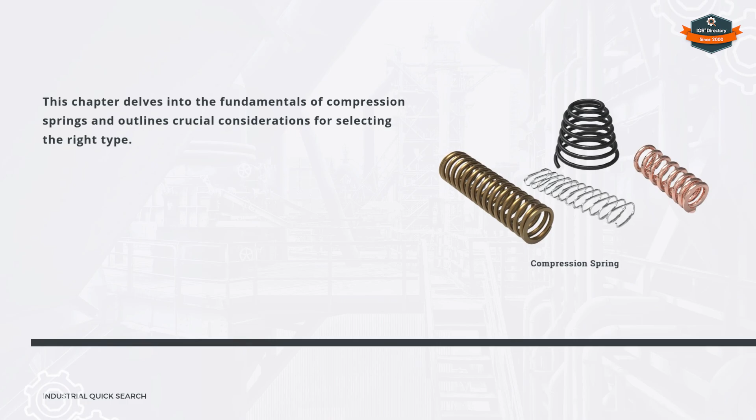Chapter 1: Understanding the principle of compression springs. Introduction to compression springs. Design and functionality of compression springs.

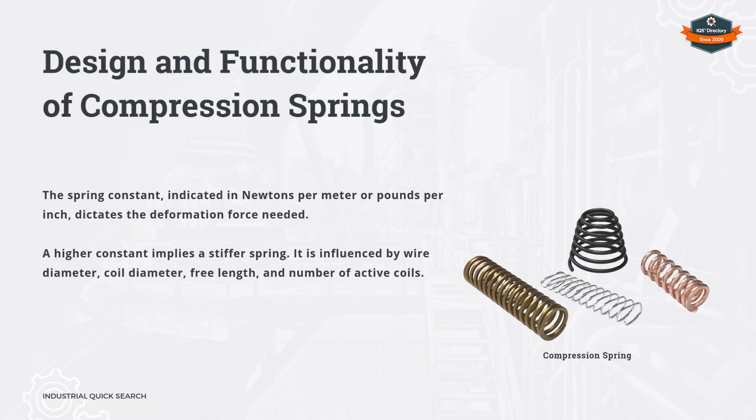Key considerations when selecting compression springs. Types of compression spring ends.

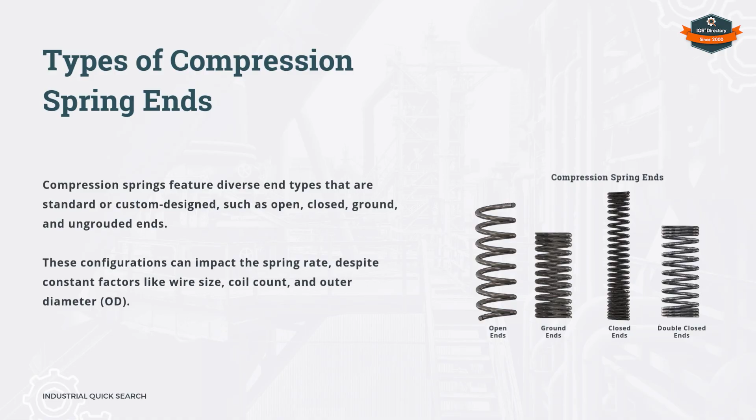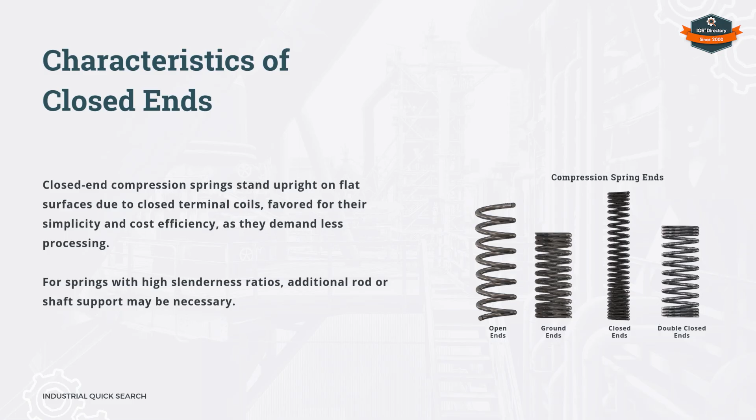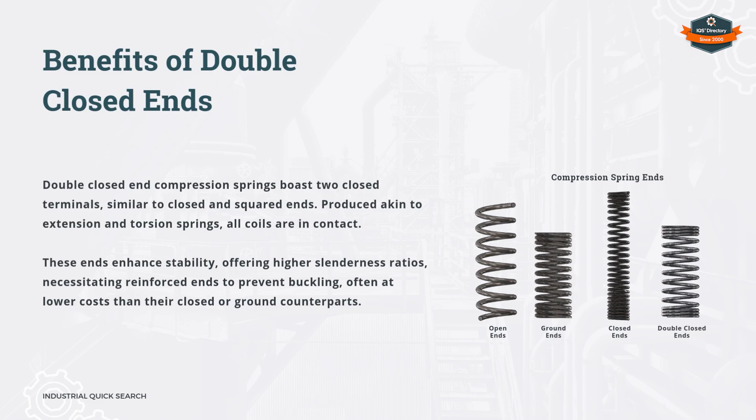Characteristics of closed ends. Features of ground ends. Benefits of double closed ends. Details on open end.

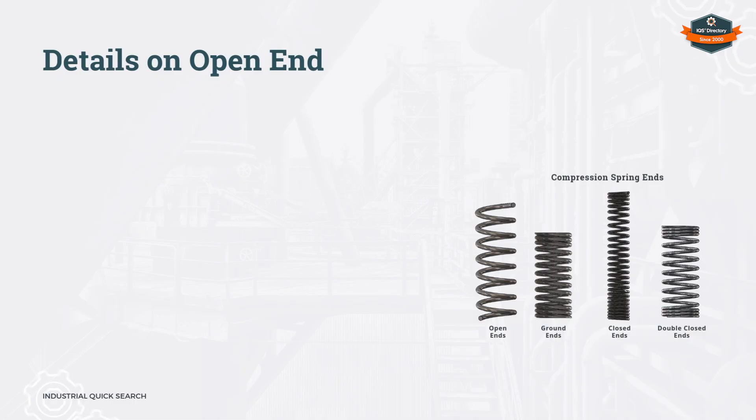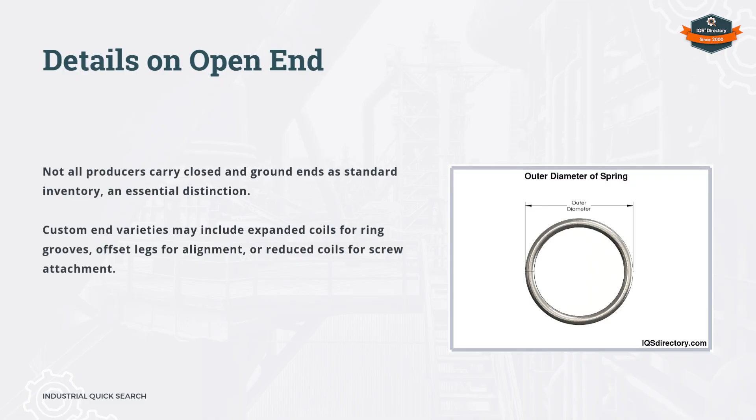Material concerns for compression springs.

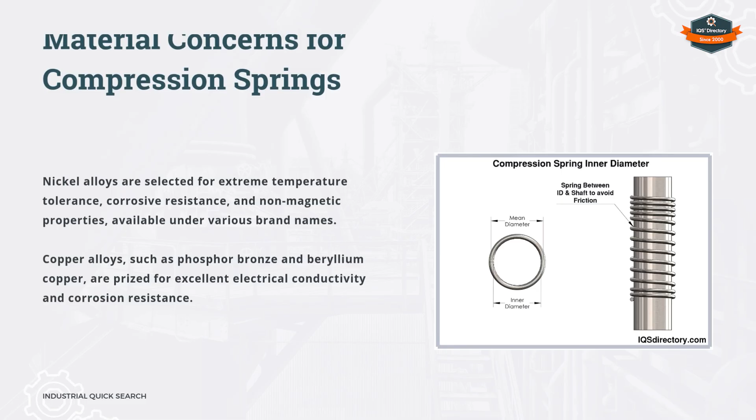Physical aspects of compression springs: outer diameter (OD), and inner diameter (ID).

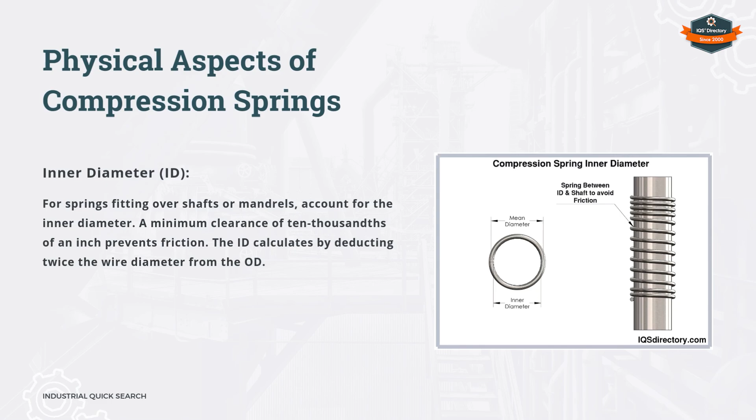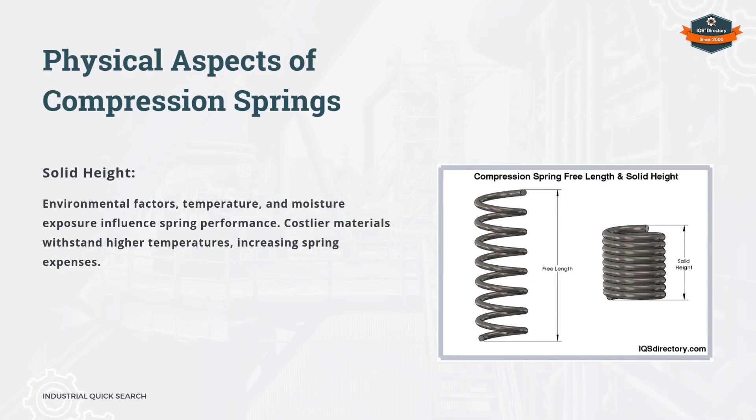Free length. Solid height. Spring pitch.

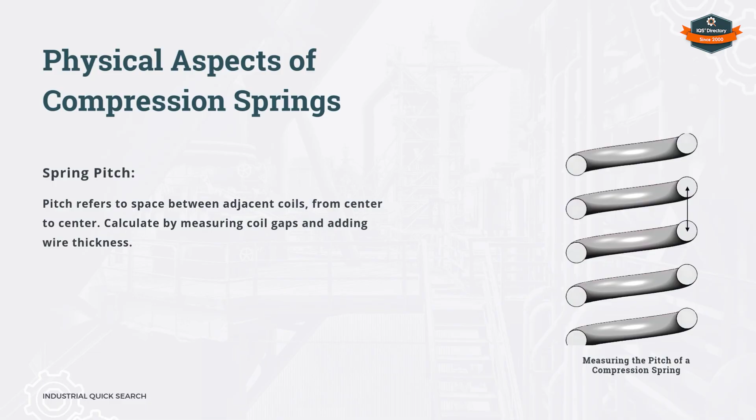Active coils. Total coils.

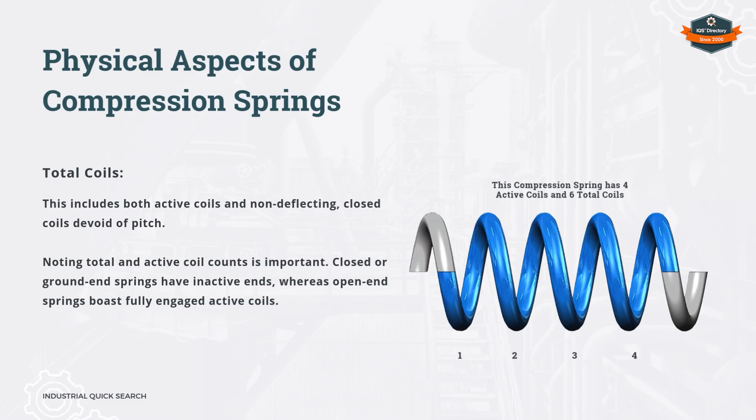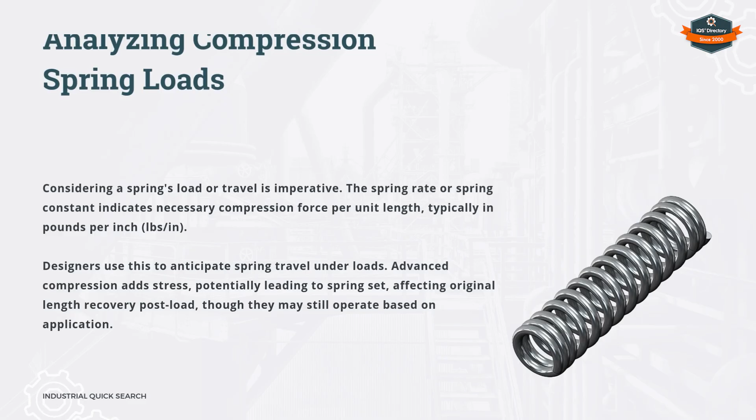Analyzing compression spring loads. Exploring compression spring wire diameters.

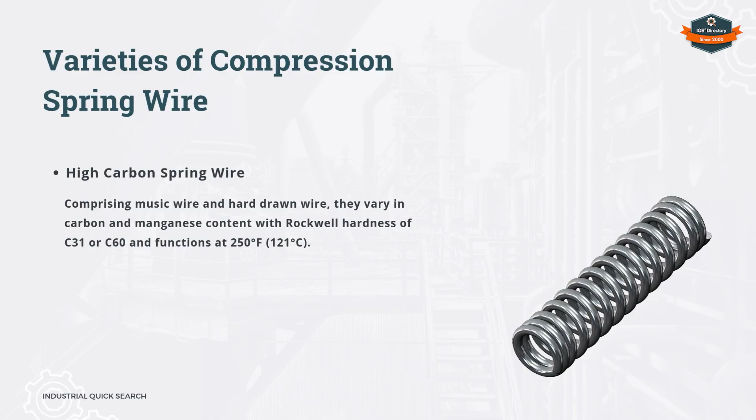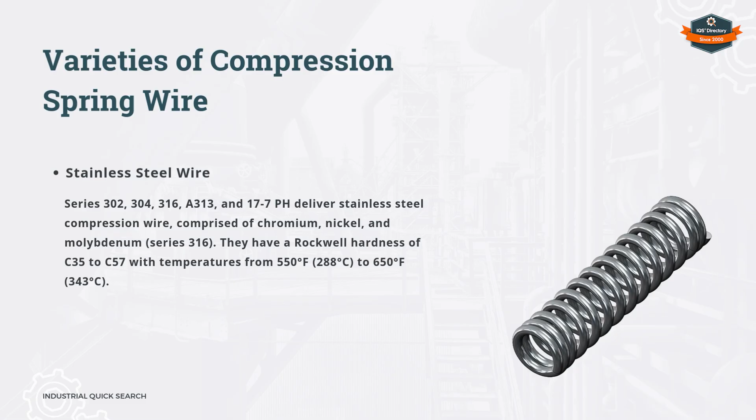Varieties of compression spring wire: high carbon spring wire, alloy steel wire, stainless steel wire, and non-ferrous alloy wire.

Compression spring wire diameters.

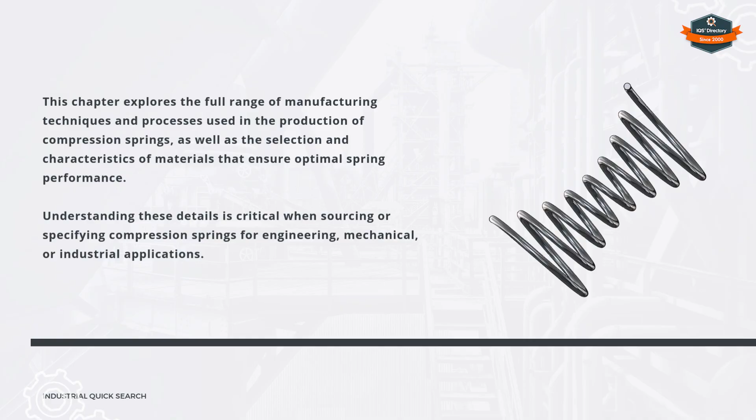Chapter 2: What are the manufacturing processes and materials used to make compression springs? Compression springs manufacturing processes.

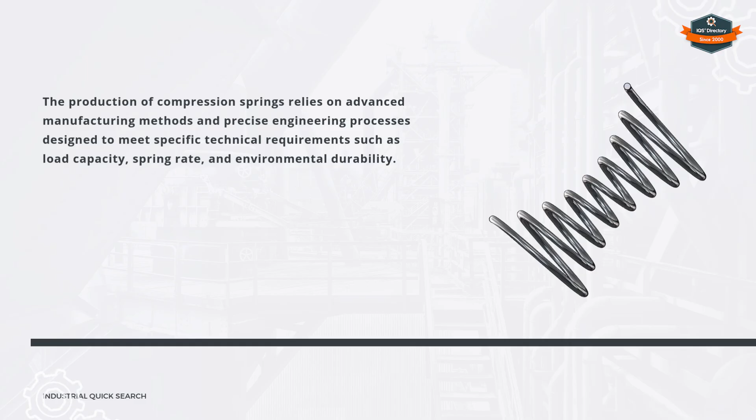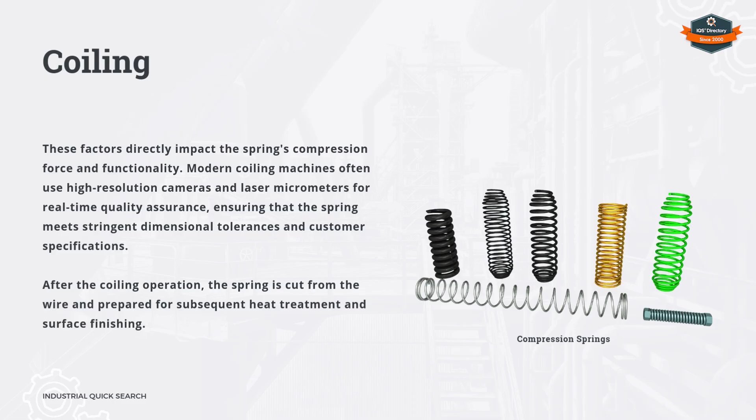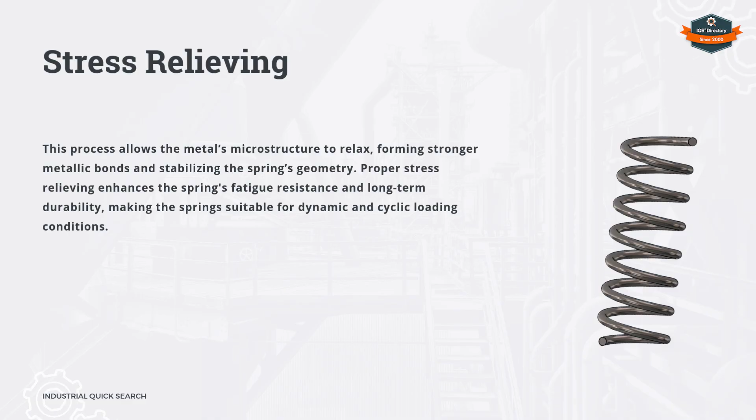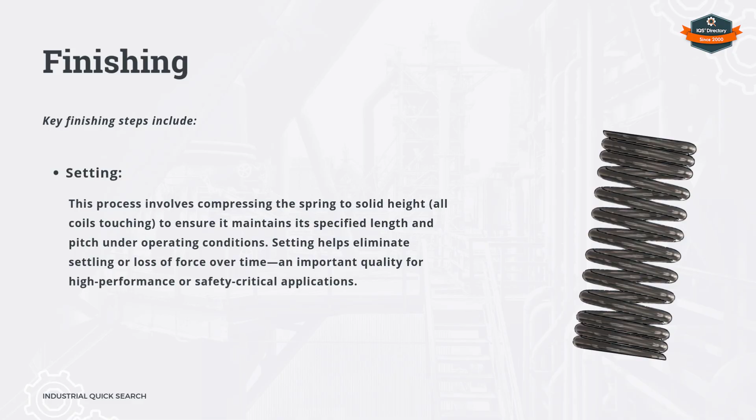The most common manufacturing processes include coiling, stress relieving, and finishing. Key finishing steps include grinding, shot peening, setting, coating, and packaging.

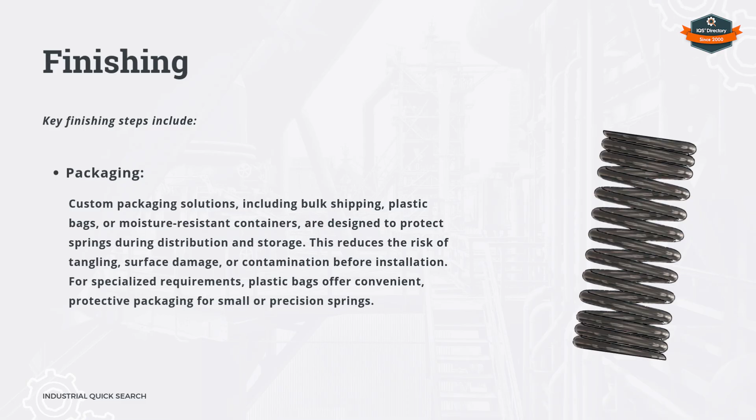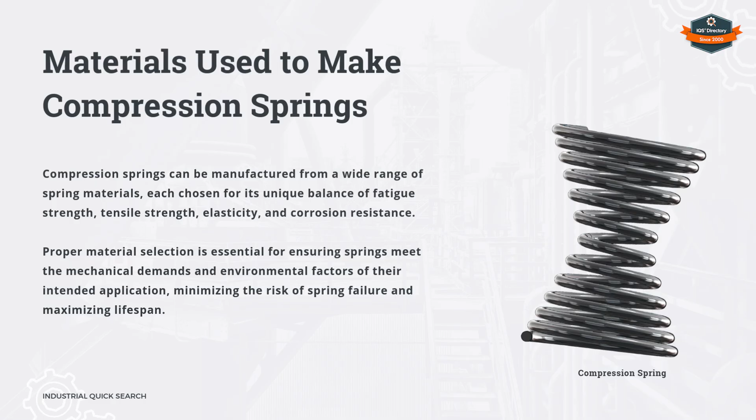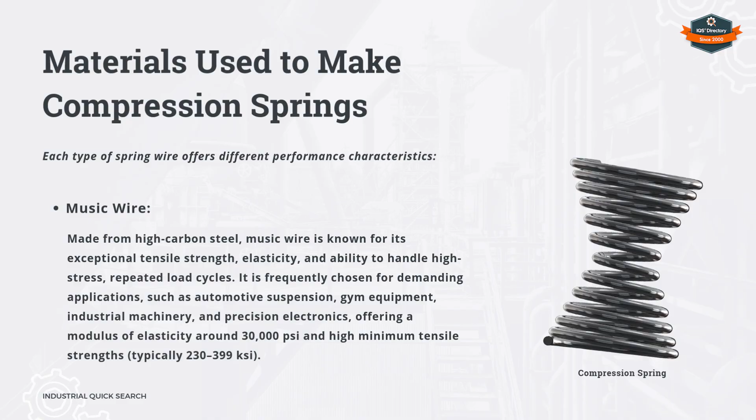Materials used to make compression springs. Each type of spring wire offers different performance characteristics, including stainless steel, music wire, and hard-drawn steel wire.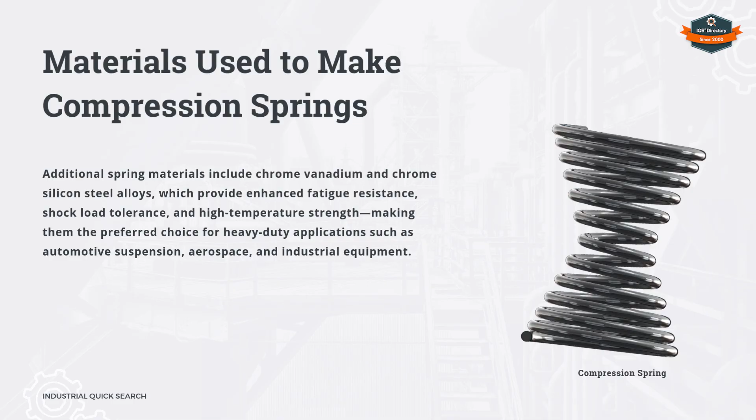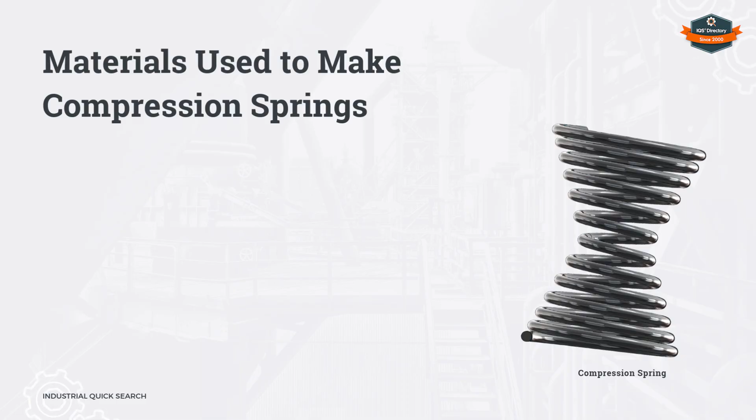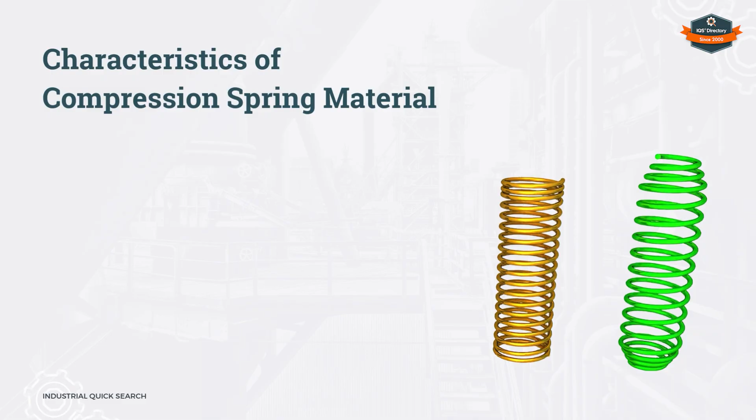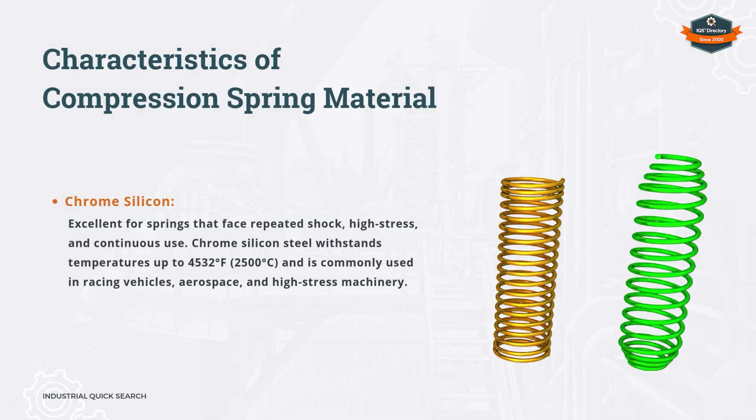Characteristics of compression spring material: cold-drawn and hard-drawn wire, oil-tempered spring steel, chrome vanadium, chrome silicon, music wire, stainless steel alloys, brass, and phosphor bronze.

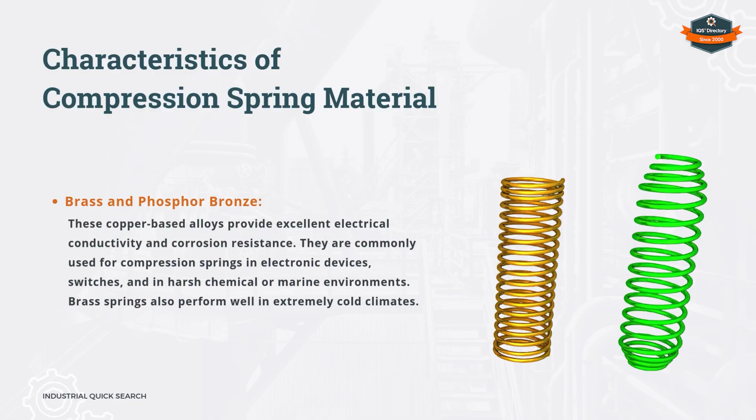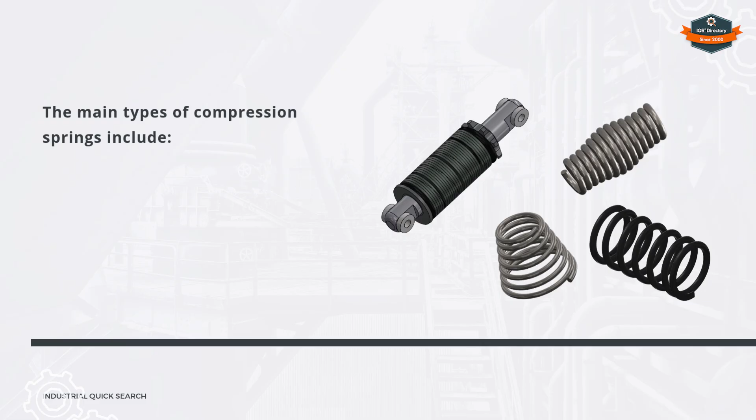Chapter 3: What are the types of compression springs? The main types include convex compression springs.

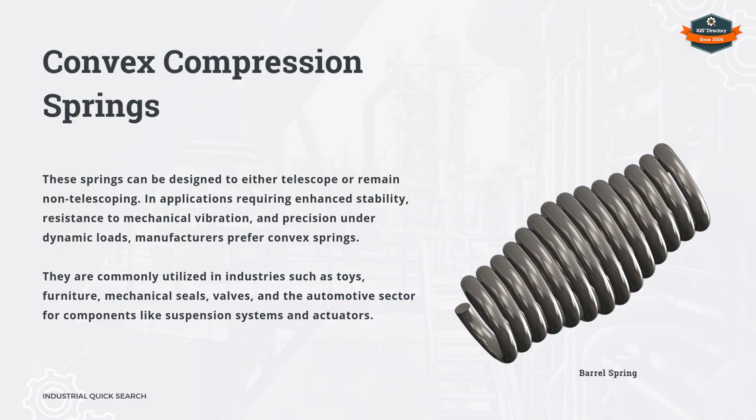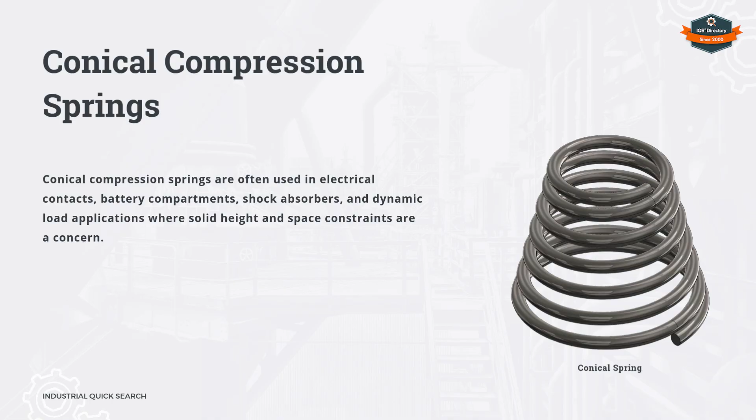Conical compression springs. Disc springs, or Belleville springs.

Here are some advantages of using Belleville springs.

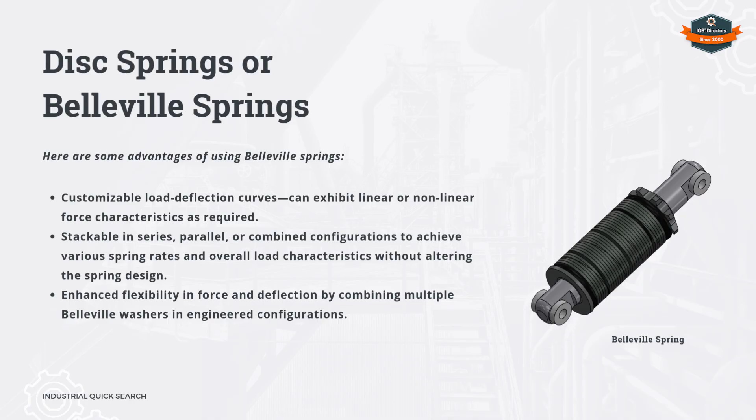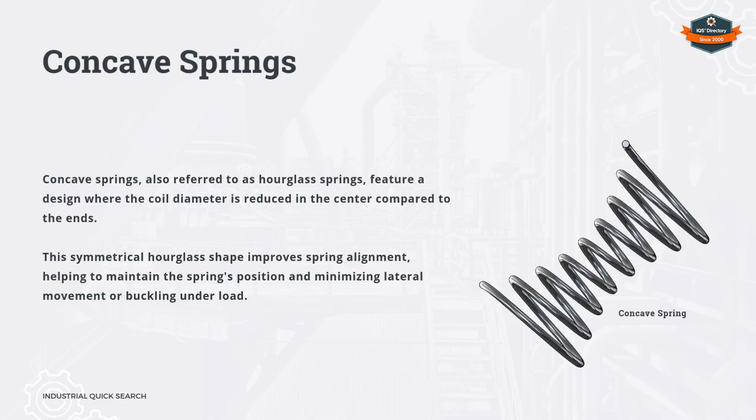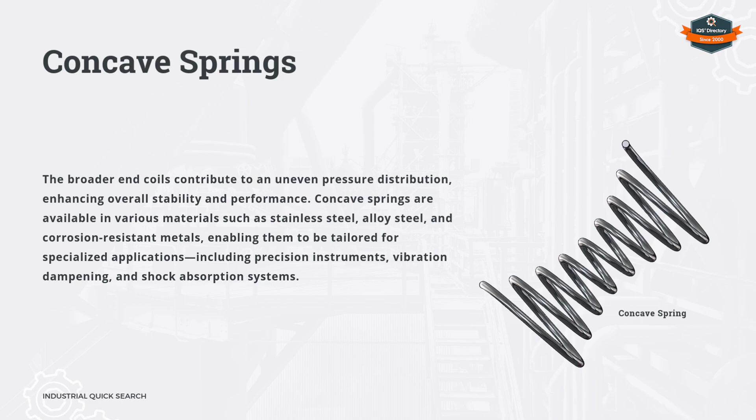Concave springs. Straight coil compression springs.

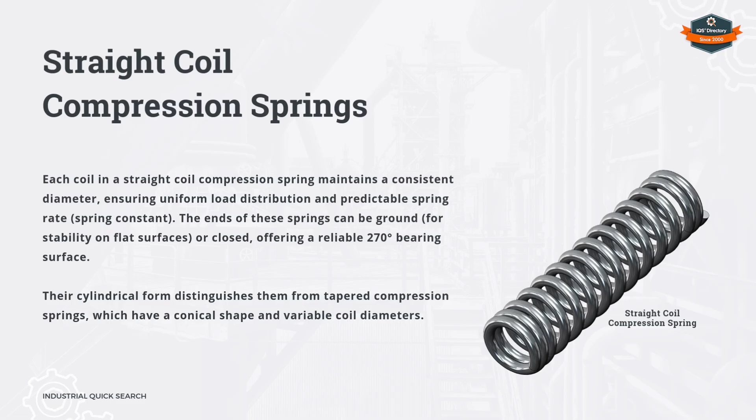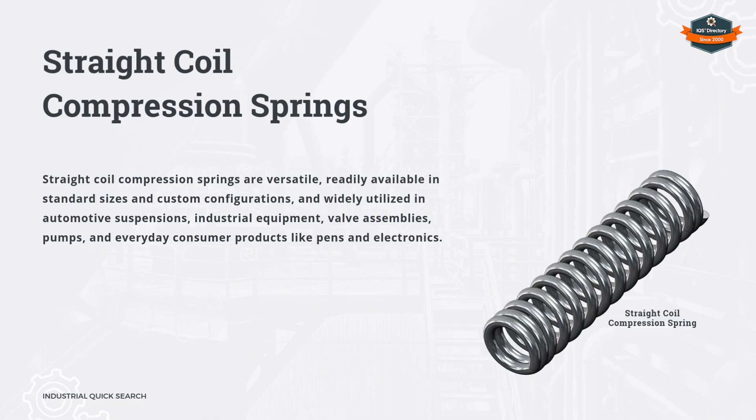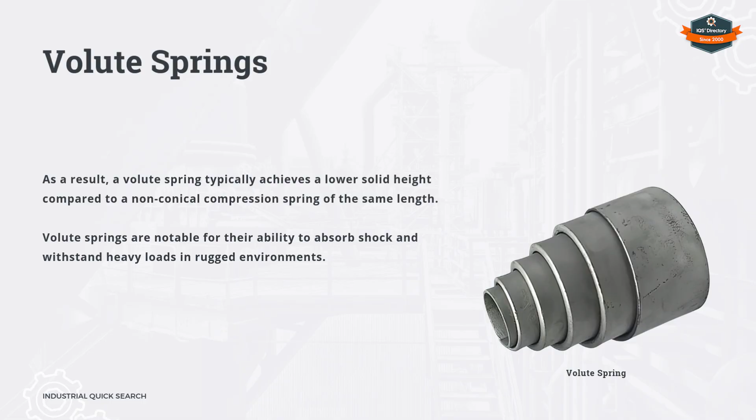Volute springs. Variable pitch spring.

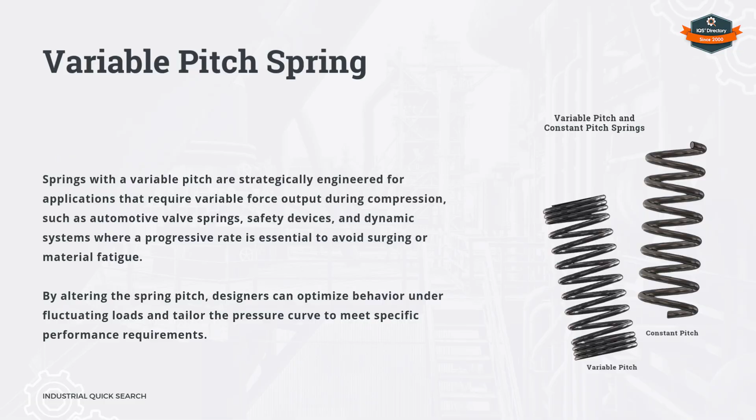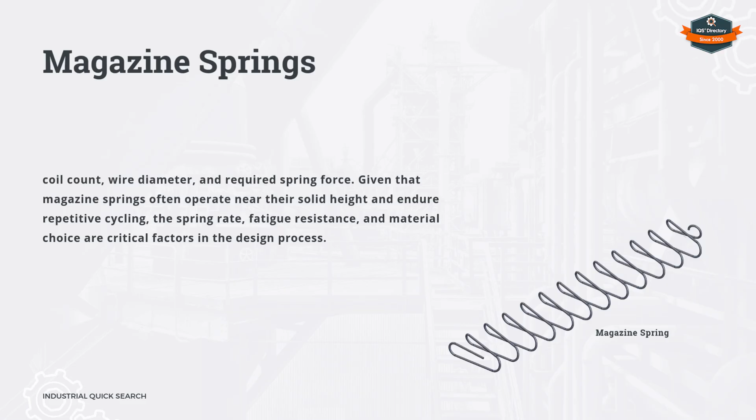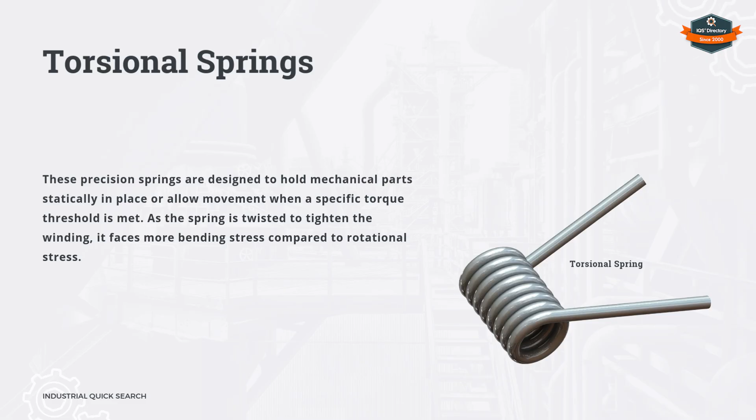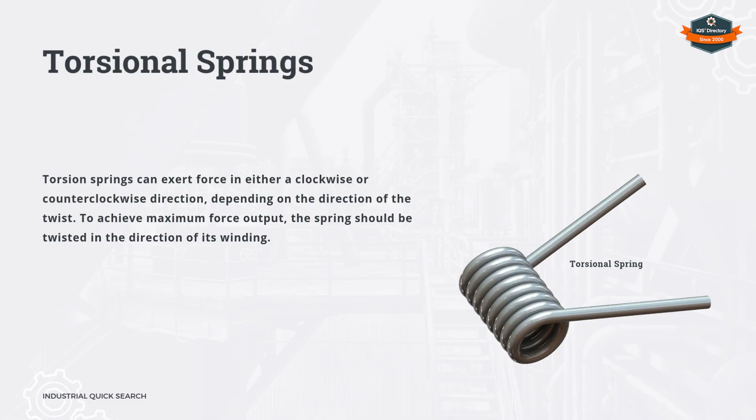Magazine springs. Torsional springs. Tapered compression springs.

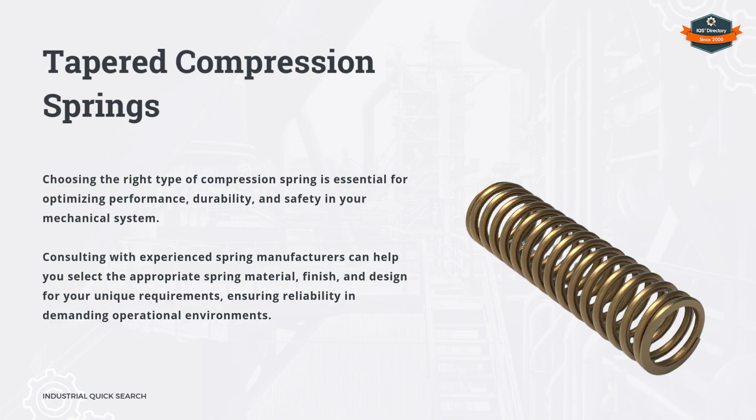Chapter 4: What are the applications and advantages of compression springs? Applications of compression springs include automobiles.

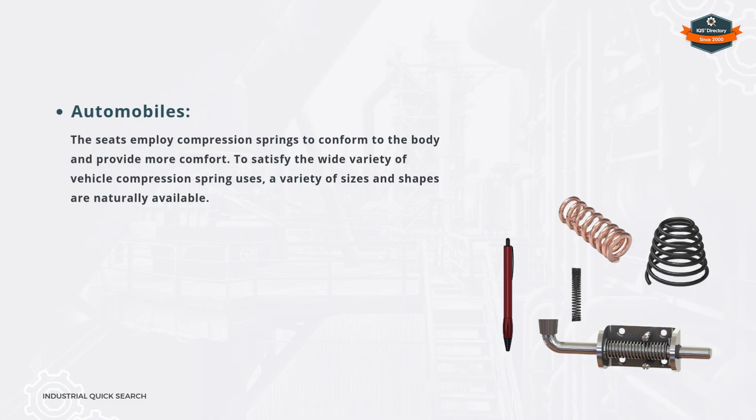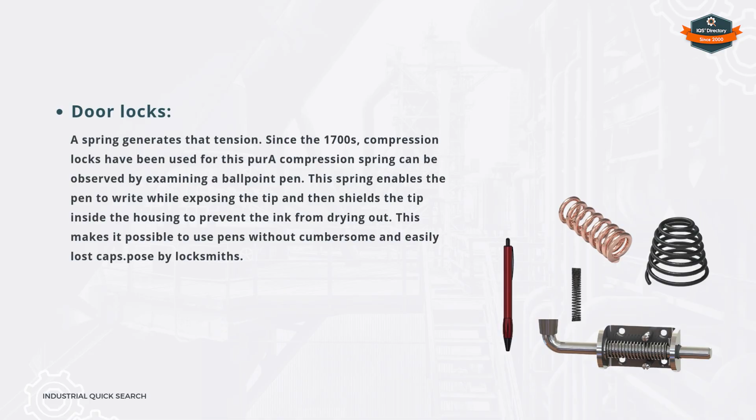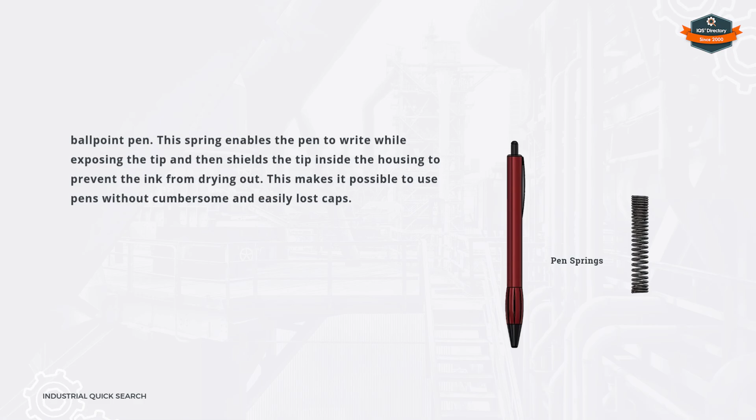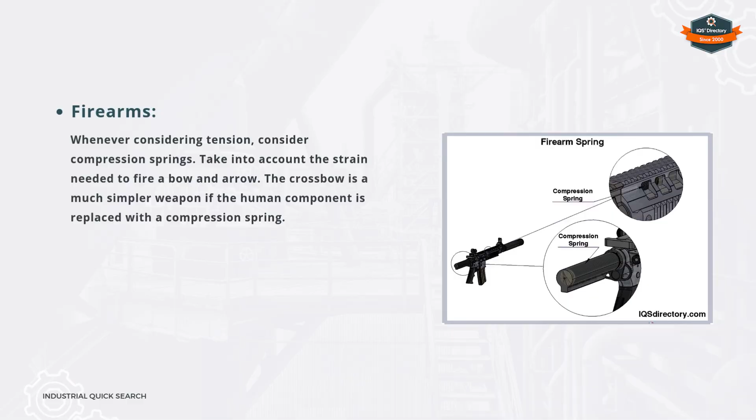Door locks. Pens. Aeronautics. Firearms. Medical devices.

Advantages of compression springs: preventing another component's movement.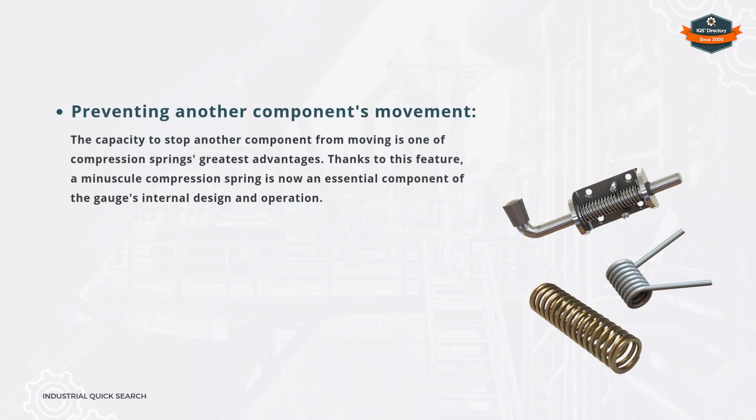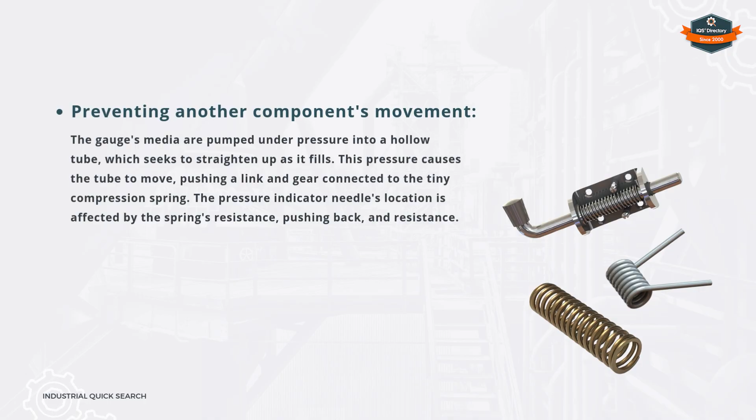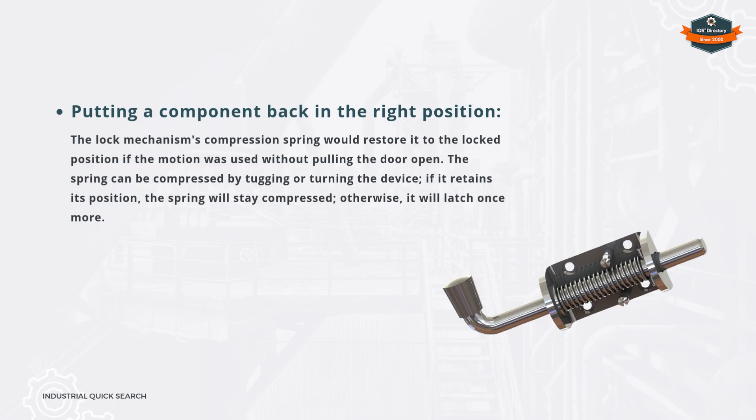Putting a component back in the right position. Applying continuous pressure.

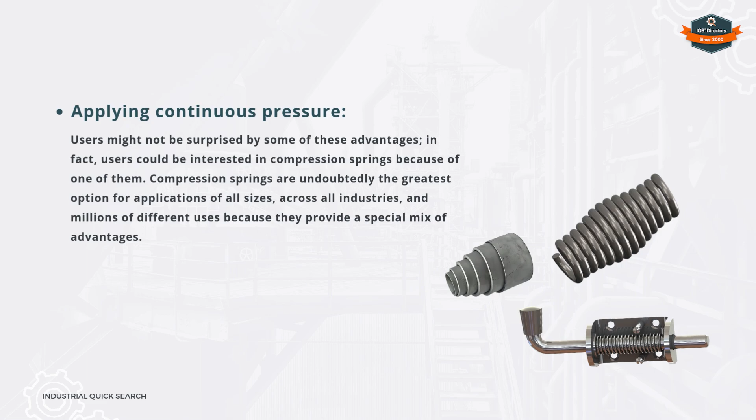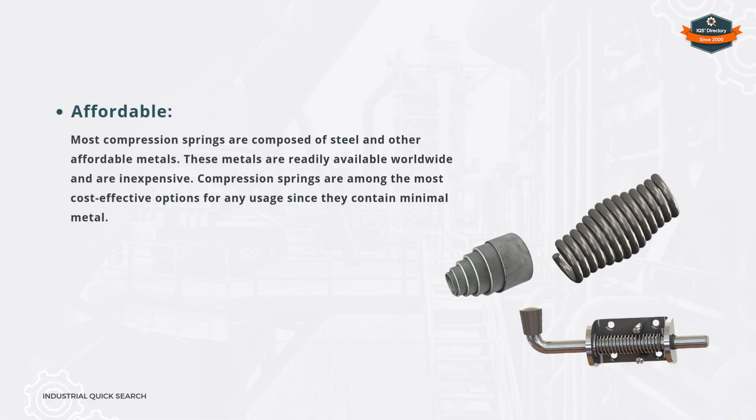Lightweight. Affordable. Maintenance-free.

Disadvantages of compression springs. The drawbacks of compression springs are as follows.

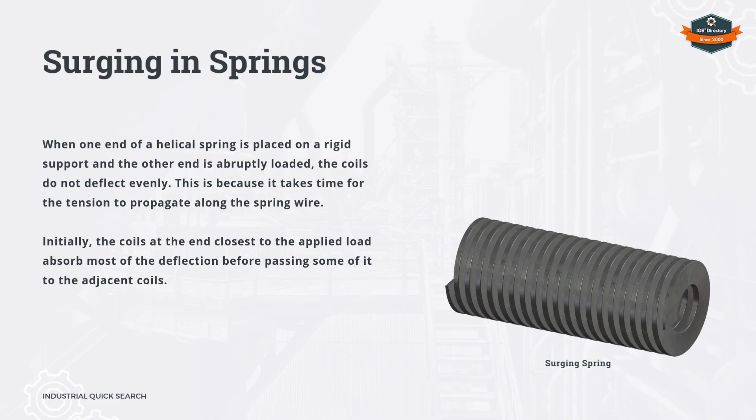Chapter 5: What are common problems in compression springs? Surging in springs. The following methods can be employed to prevent spring surge.